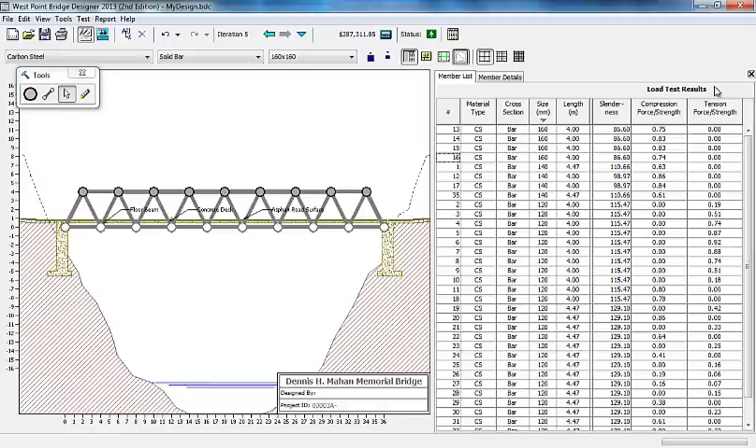The last thing you'll do is actually take a screenshot of your bridge, and you'll bring that right into SketchUp to draft off of. You can do that by usually just finding the print screen button at the top right of your computer. If you're on a laptop, you'll probably need to hold the function key to find print screen. Hold down the function key, press print screen, and even though it doesn't look like anything happened, it actually just took a picture of your bridge.

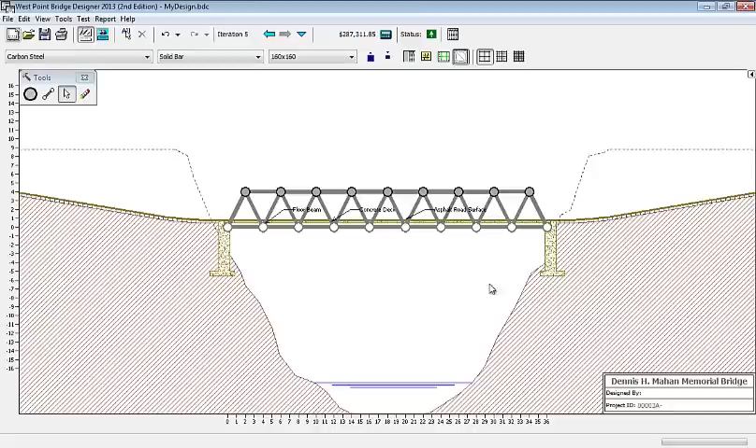Then you'll need to find a way to save it as a photo. There's a lot of different ways to do that, but I'm just going to use Word, right click and paste my photo, and then right click on it and save as a picture. I'll save that to my pictures library, call it bridge, and hit save, and now we can bring that photo into SketchUp.

When you open up SketchUp, if this is your first time using it, you want to make sure you choose a template. Even if you've used it before, double check you're using the correct template. The one I recommend is called Product Design and Woodworking Millimeters. There are a lot of other options, but I find millimeters works really well with our 3D printer and for measuring. So I'll select that one and start using SketchUp.

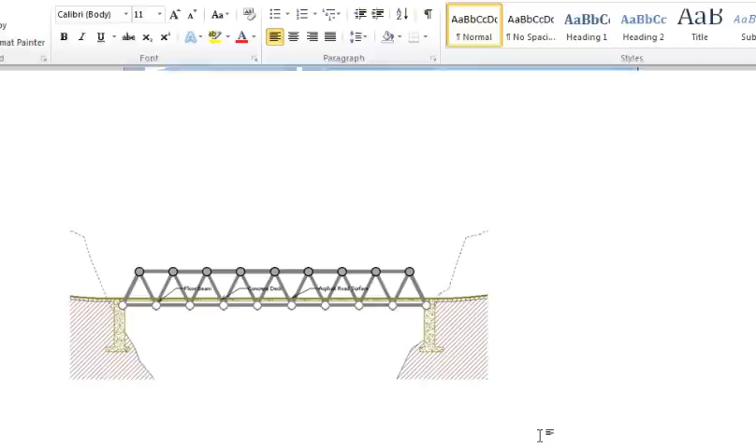If you have not seen the overview of SketchUp, the first couple tutorial videos, I highly recommend those. They'll give you some pointers about the axes and the toolbar. We want to put this picture on the red and green axes, because that is our base, and then we'll build our bridge up along the blue axis.

To bring your screenshot of your bridge into SketchUp, we want to first start with a rectangle to place the image on, and make sure that's the correct scale. Our bridge needs to span a distance of 5 inches, which is about 127 millimeters, and our 3D printer can really only print about 8 inches wide, which is around 200 millimeters.

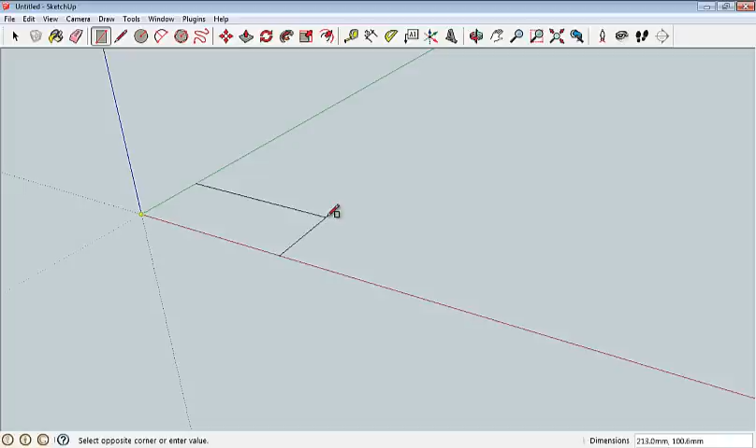So I'm going to draw a box that's about 200 millimeters long, so I can see that down in the dimension box. I'm around 200. I'm not going to worry about being exactly there — we can always scale it up or down a little bit — and the width doesn't really matter right now, so I'll just go around 100.

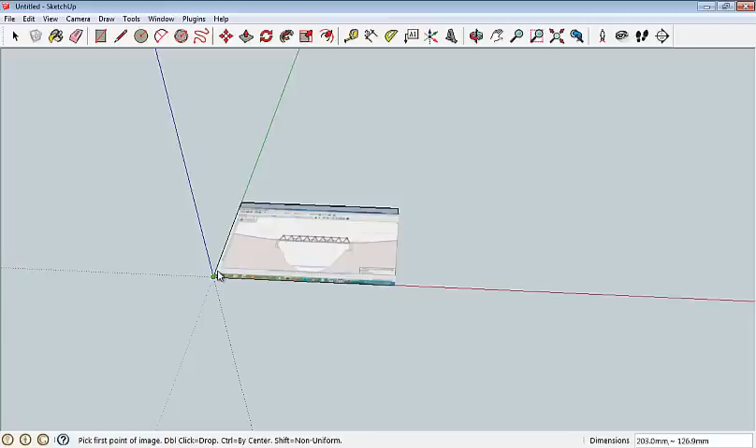To bring my picture in, I'm going to go to File, Import, and find my file in my pictures. I didn't see it as a JPEG, so I selected all supported image types, and there it is — it was a PNG file. So I'll open that, and I want to place it on my rectangle, then scale it up a little because right now it's quite a bit smaller than the rectangle.

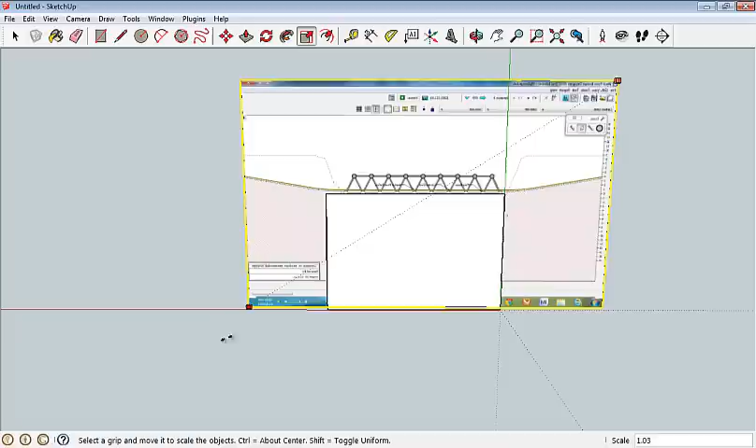I want the actual bridge to be about the size of the rectangle, and now I can't really see my rectangle anymore for positioning. So if you orbit around, I'm going to move my picture over and scale it again with the scale tool — grab the corner and stretch it out until the bridge spans pretty much the entire rectangle.

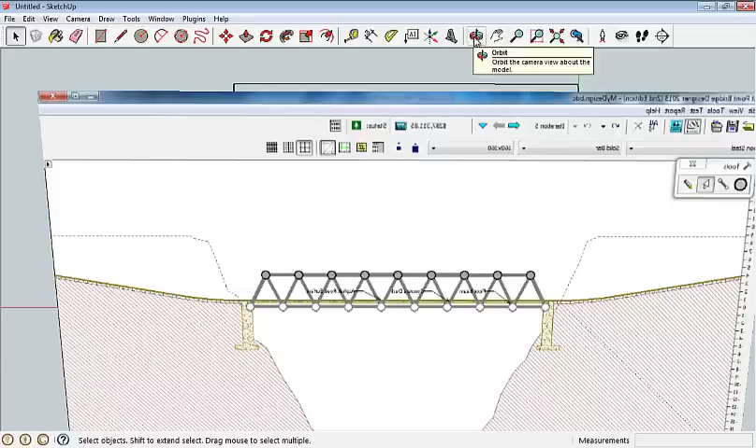That looks pretty close. Now I want to lower it down so it's right on the edge, and that can be kind of tricky if you can't see through the box. So sometimes I'll actually just click on it and delete it. By deleting the box, now if I orbit back around, I can see my line a little bit better.

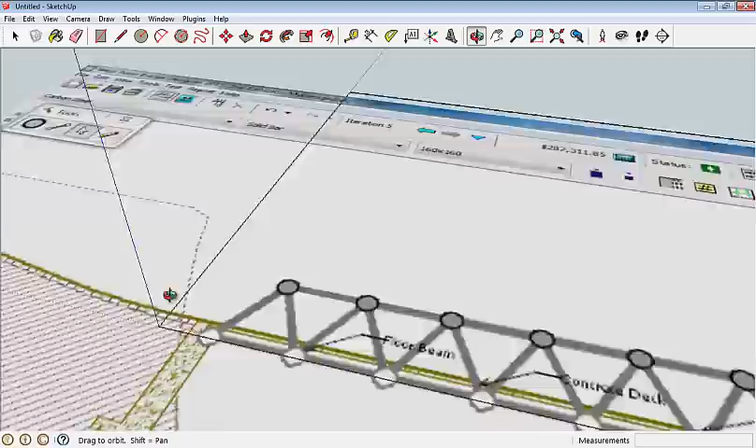That looks pretty close — the bridge surface is right along the bottom of the box. I do want the bridge to start at the origin. Things don't have to start at the origin, but it's kind of nice if they do. So I'll scoot my image over a little more, right to the corner. You'll notice as I'm moving, it says next to the cursor which axis — red in this case. You really want to watch for those sorts of things as you're working; that can be a good guide to show you're moving in the correct direction. And we'll go ahead and leave it there.